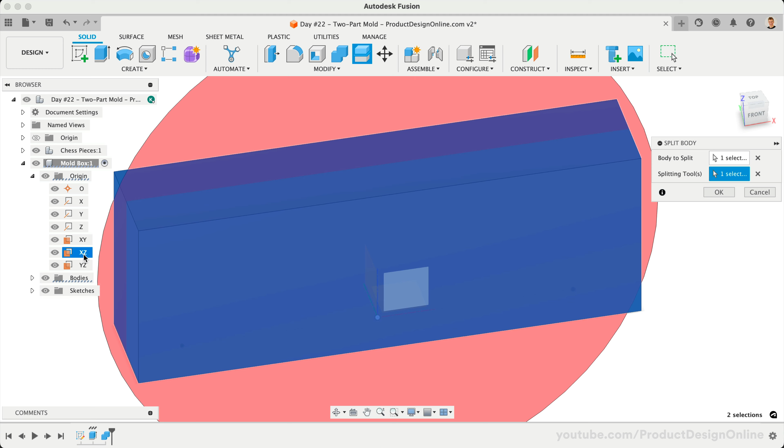Welcome to day number 22 of Learn Fusion 360 in 30 days. I'm Kevin Kennedy, and today we'll discuss the core workflow for creating two-part molds, including registration pins, clearances, and more.

To start, open the demo file, which includes these example chess pieces. Before we create the outer mold box, we'll want to consider our parting line. A parting line is the line between the two halves of the mold. Our x-axis, where the reference line is sketched, can serve as our parting line. With that in mind, we'll want to ensure our objects are all in their ideal position.

We'll want symmetrical objects to be placed so their symmetry line matches our parting line, retaining the symmetry. For non-symmetrical objects, we'll want to consider if the position will affect the outcome of the mold. Starting with the king, you'll see that we'll be splitting it down the symmetry line, so nothing to change here.

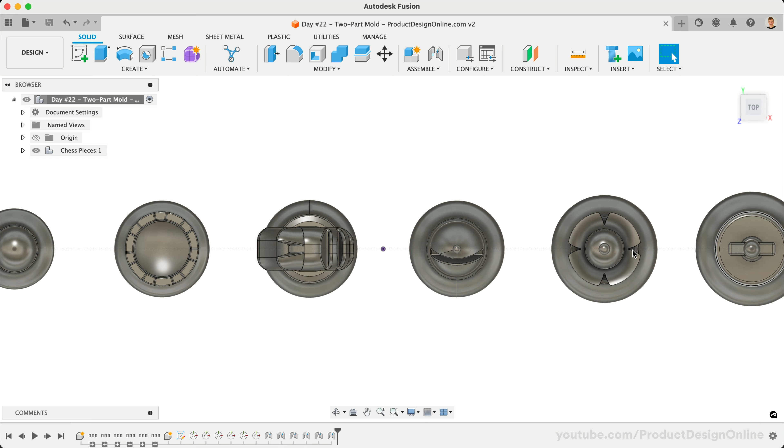The queen is also symmetrical in shape. However, these small areas are less than ideal for a parting line as we want to avoid brittle areas. To solve this, let's go ahead and rotate the queen 45 degrees by editing our joint. For your convenience, I've labeled the joints in the browser. We can right-click and edit the queen joint.

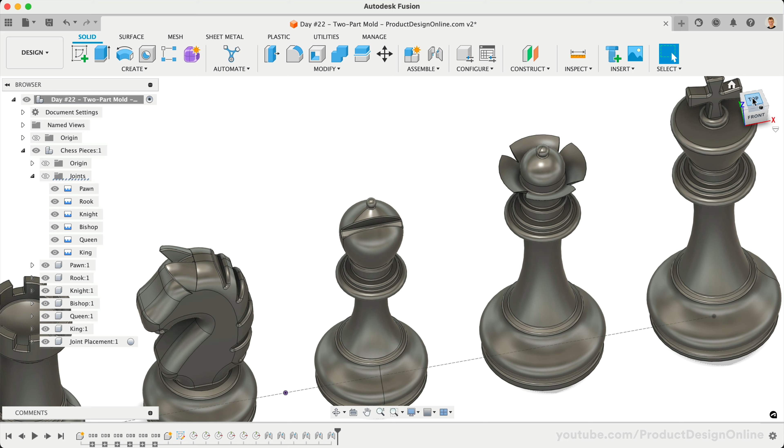Rotate this 45 degrees. Our parting line will now cut the model where there is additional geometry. Small detailed areas can be problematic when aligned with the parting line. Our bishop is symmetrical, but it's not in the correct position. Let's edit the bishop joint and rotate this 90 degrees. Its symmetry line now matches our parting line.

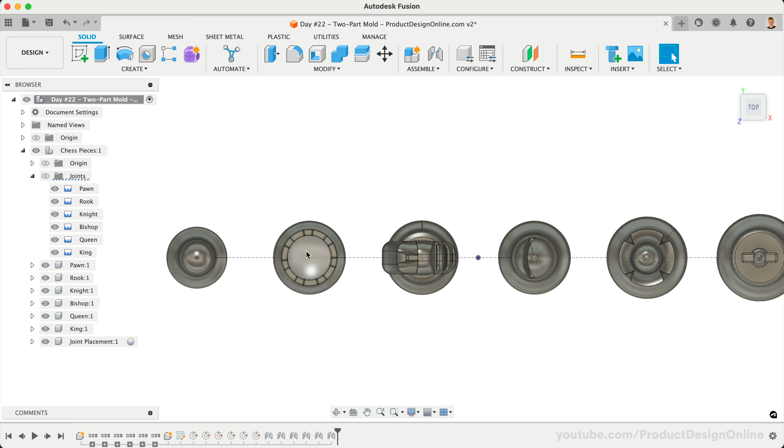The knight looks correct, so we can move on to the rook. Currently, the parting line would be close to this extrusion. However, this one is a bit tricky the way the top extrusions are spaced out. Let's go ahead and rotate this 10 degrees, allowing our parting line to run down the middle of each stub.

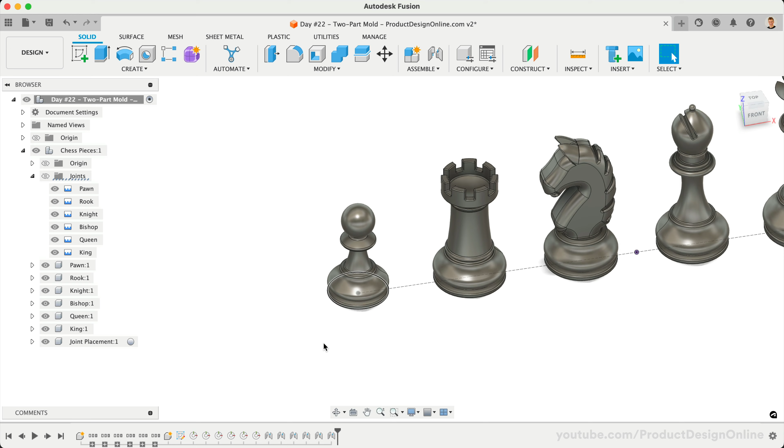Lastly, the pawn is ready to go, so we can proceed by creating our outer mold box. We'll then cut away the positive chess shapes and discuss registration pins and clearances. First, let's create a new component in the browser for our mold box. We're going to make a simple box that surrounds all of the chess pieces, so let's sketch a rectangle on our bottom origin plane. Remember, you can quickly activate rectangle with the keyboard letter R.

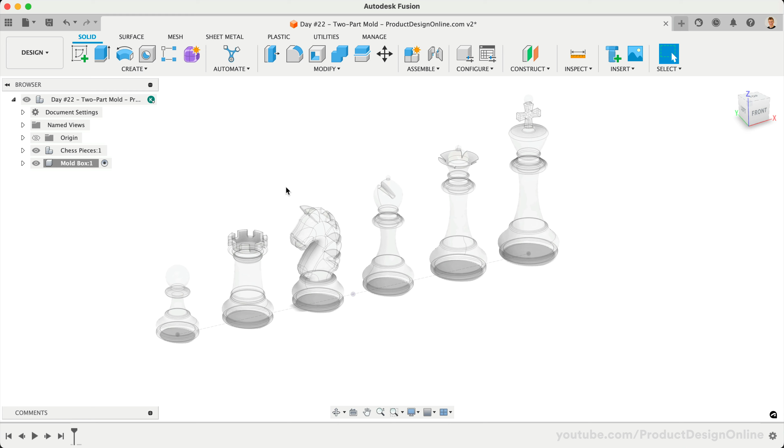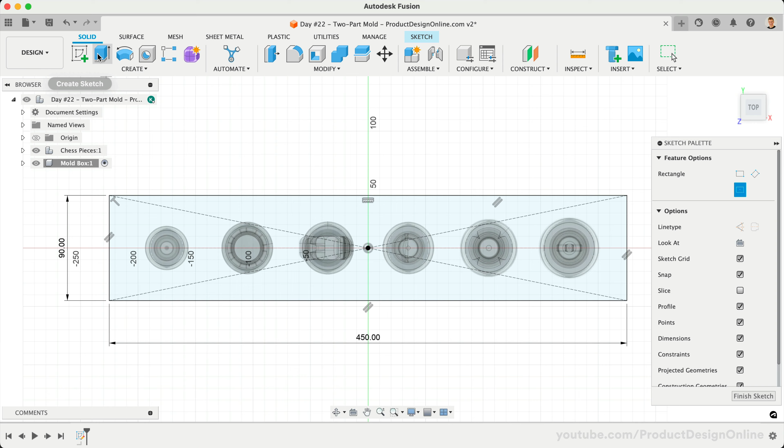Before selecting the origin point, let's switch our rectangle to the center point rectangle. This will allow us to define the length and width from the origin point, since the chess pieces are centered from the origin. We'll make the length 450 millimeters and the width 90 millimeters. In general, these dimensions just need to be larger than your object, accounting for enough material on the outer edge of the mold design. We'll then extrude this beyond the king to a height of 160 millimeters.

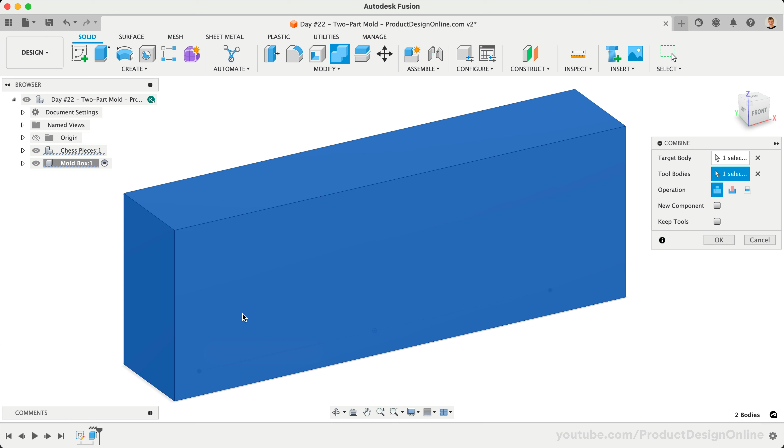We're now ready to subtract our positive chess shapes from the outer mold box. Similar to our one-part mold on day number 21, we'll achieve this by using the combine command. Once active, select the mold box as the target body. The tool bodies will be each of the 6 chess pieces. Remember, you can select them in the canvas, which is our model, or we can select them in the browser.

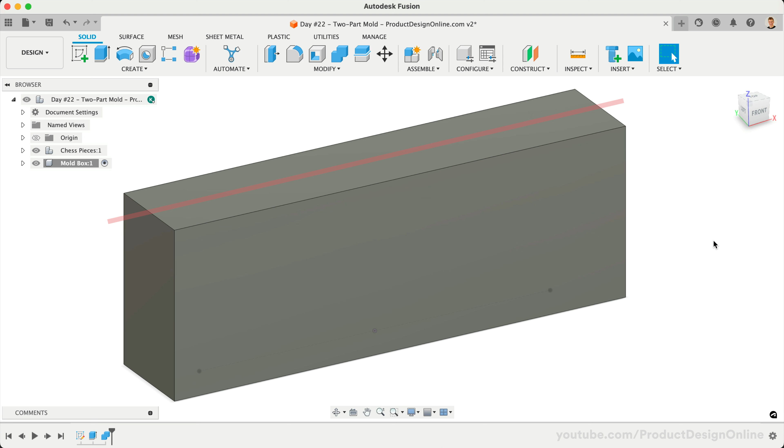Double check that we have all 6 selected, and we'll change the operation to cut. We'll also check Keep Tools. I always recommend keeping the tools in case you need to make design changes later. With our chess pieces removed from the mold, we'll now create our parting line. I set up the demo files from the center of the origin, which will allow us to use the origin plane as our cutting plane.

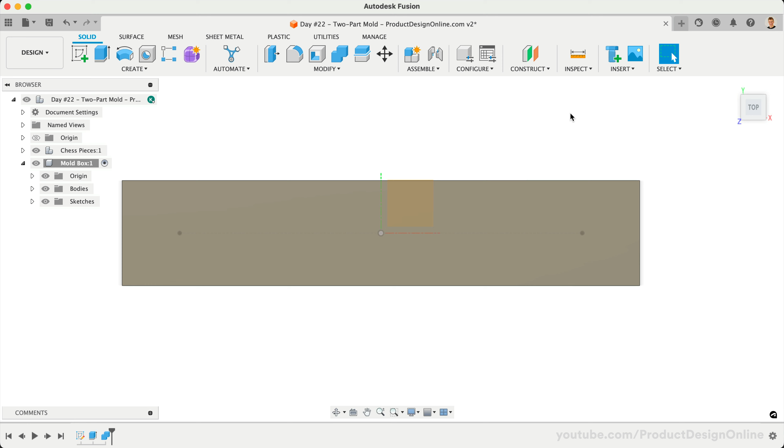However, when designing for mold making, you can also use any of the construction planes to create precisely placed parting lines. This is helpful when you need to create 3-part molds or other mold types that have more than one parting line. Activate the split body command. Similar to the combine command, start by selecting the body to split, which is our mold body.

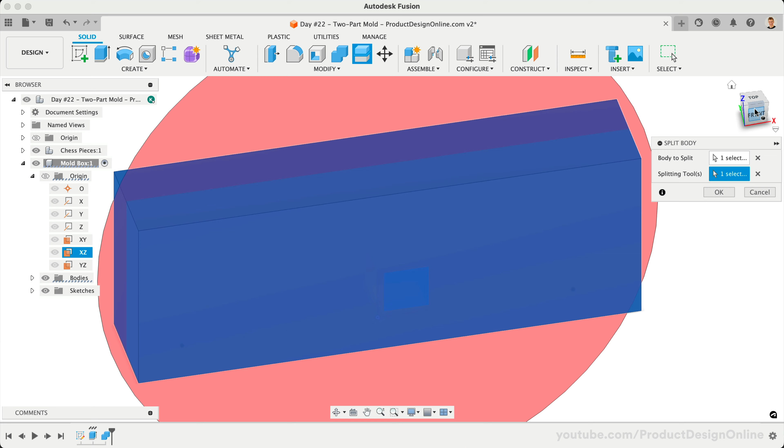We'll then choose our XZ origin plane as the splitting tool, as this origin plane aligns with our parting line. Notice it's highlighted in red, helping us double-check the splitting direction. After selecting OK, we'll have 2 different 3D bodies in the browser. Let's rename these left and right so it's easier to place our registration marks.

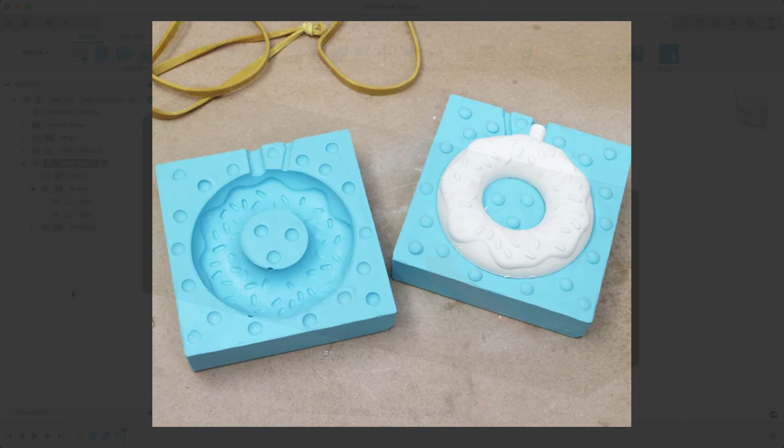Registration marks, which are sometimes referred to as keying, is the process of adding unique stubs on one half of the mold and corresponding indentations on the other half of the mold. This allows the mold parts to quickly line up with accuracy. Registration marks are commonly created with half spheres or other common geometric shapes.

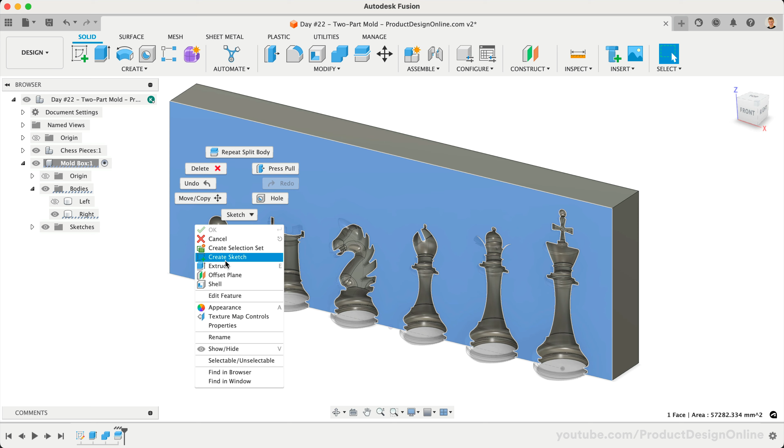I'll hide the left body and right-click to create a sketch on the right body. I recommend a minimum of 3 registration marks to help align the mold. Large molds may require additional. Because spheres don't print as well as other shapes, I also recommend using triangles or polygons for your shapes. Take a few minutes to add 3 or 4 registration marks around the mold.

Be sure to keep them approximately 5 millimeters or more away from the edges or the mold cavities. You'll also find it helps to place them randomly, allowing the mold cavities to only work in a single direction. This is particularly helpful when your design is in the middle of the mold.

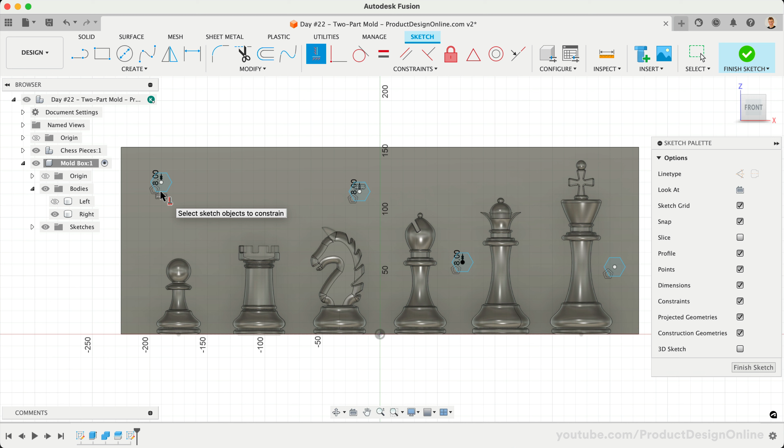Optionally, you can use the Sketch Dimension tool to precisely place the sketches away from the edges. Something like this is where it can be deemed okay to not fully define your sketch, allowing you to click and drag the stubs around after they're cut out of the other half of the mold. Let's extrude each sketch profile to a distance of 8 millimeters.

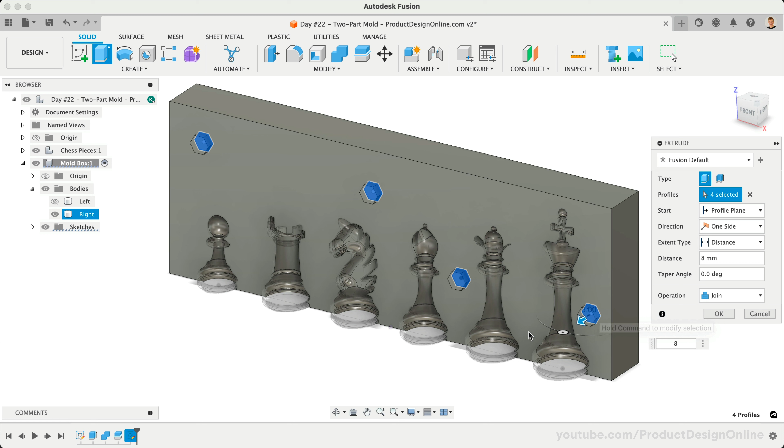Once our registration marks are sticking out on one side of the mold, we'll need to cut them out on the opposite side. We can do this using the Combine command, just as we did with the chess pieces. Turn the left body back on and activate Combine. After selecting the left half as the target body, we can select the right half as the tool body.

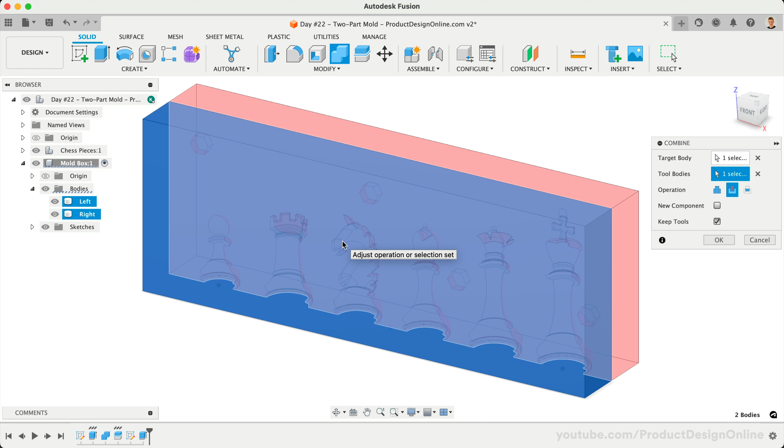This is because our stubs join the existing 3D body. Had we set the extrude feature to create new bodies, we could instead select the stubs individually. We'll double-check the operation is set to cut and the Keep Tools option is checked. Once complete, let's hide the right body and take a look at the results. All of the registration indentations should now appear.

However, we must factor in a small clearance for the 3D printing process. In our case, we'll want to add a total of 0.15 millimeters in clearance, which is a good starting point. We can achieve this clearance with the Offset Face command. Once active, we can do a window selection over the first registration indentation. This should have a total of 7 faces selected, the individual back face and the 6 side faces.

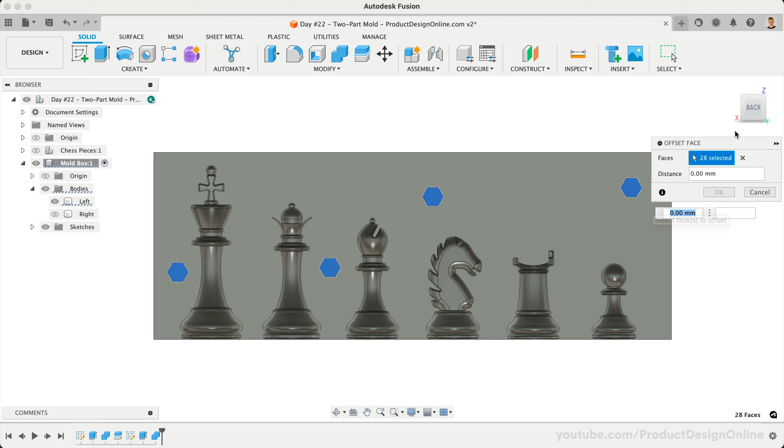We can hold down the Shift key and complete window selections over the remaining indentations. Double-check you didn't select any mold cavity or other faces during this process. Once everything is selected, we'll subtract 0.075 millimeters because the offset is taking place on both sides.

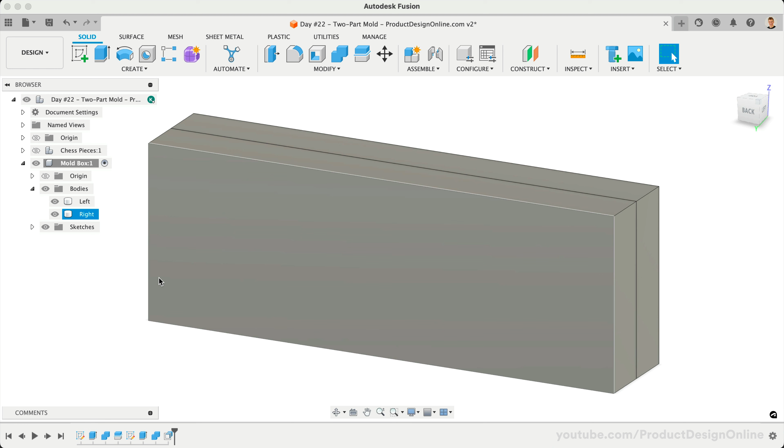As an optional step, I like to add chamfers to all the outer edges of the mold box. Take a minute to play around with some different sizes. These chamfers can help reduce some of the material and get rid of the sharp corner edges that are prone to warping.

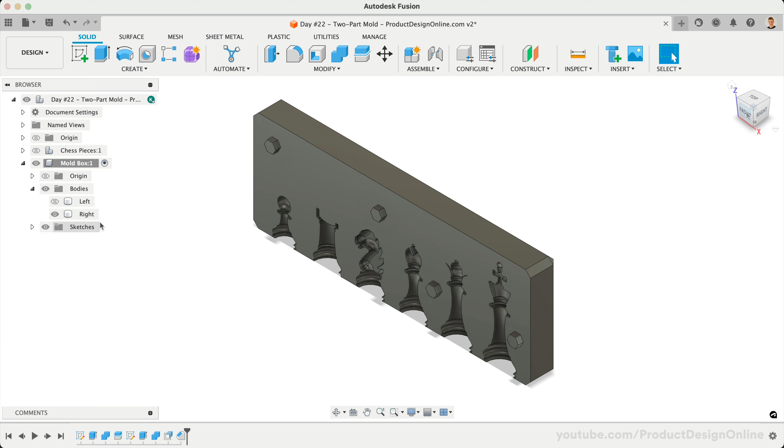Last but not least, we need to consider whether the mold needs a cavity for pouring the material. When the design has a flat bottom, such as our chess pieces, you'll find it easiest to use the flat portion as the pour cavity. This is why we created our mold box from the bottom instead of encasing the entire object. When the object does not have a flat portion, I recommend using the Hole command to create a pour cavity with a chamfered edge.

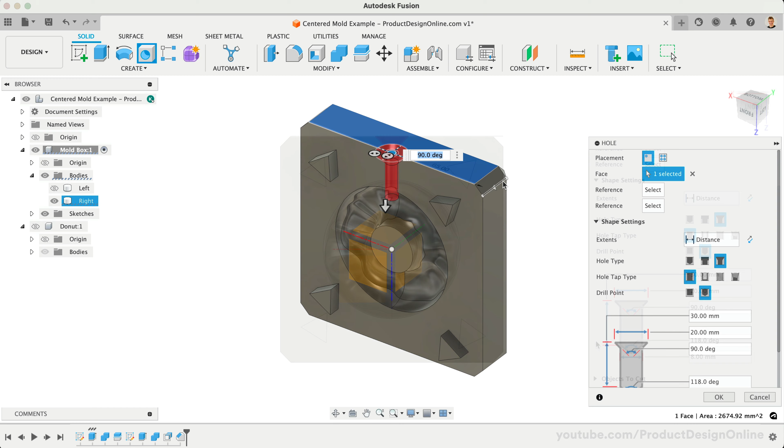In addition to the pouring cavity, multi-part molds work best when they have a vent hole. This allows air to escape as the material flows into the void. This will reduce the potential of air bubbles getting trapped, as well as help smaller details come out well. Vent holes can be done with a simple extruded circle, or you can make them by sweeping a circle into the cavity.

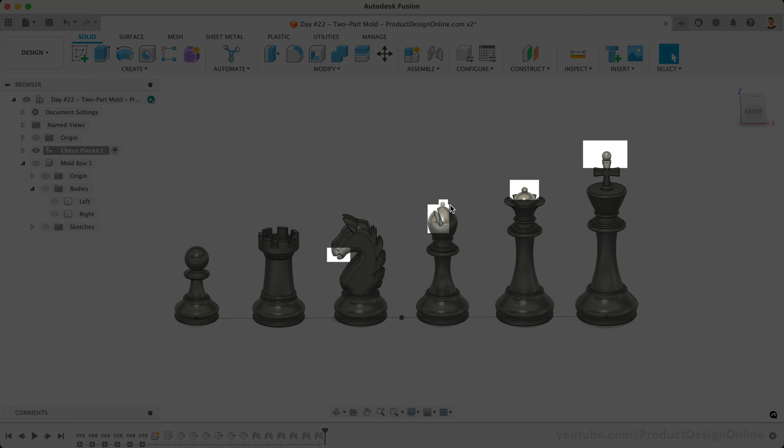You'll also want to consider any objects that may be too small for the mold. The tops of our queen and some other pieces may not come out well depending on the materials used. Consider removing them as well as filling in any voids that may be too small. Don't forget certain designs and materials may require a 2 to 5 degree draft angle, similar to the one-part mold in the previous lesson.

I'll see you on day number 23 where we'll discuss assemblies and joints in Fusion 360.